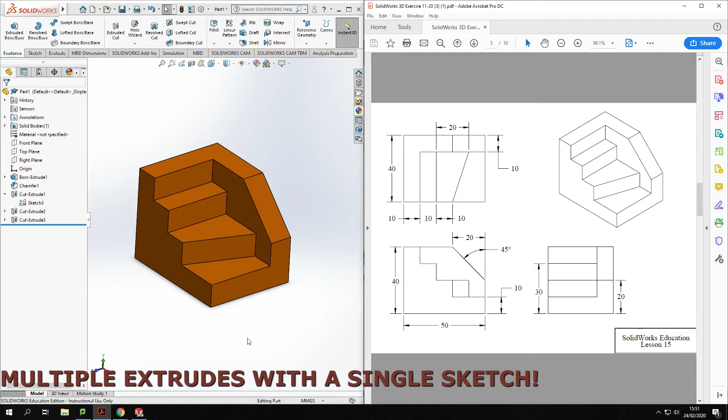This is another tutorial in the series of the Beginners Modeling series. What we are going to look at today is making this model here, and we are going to be looking at how we use a single sketch to create multiple cut extrudes or extrude cuts into this shape. So I'm going to take you through that process, and hopefully you all learn something new if you're just getting started, and this is going to be a great tutorial for you.

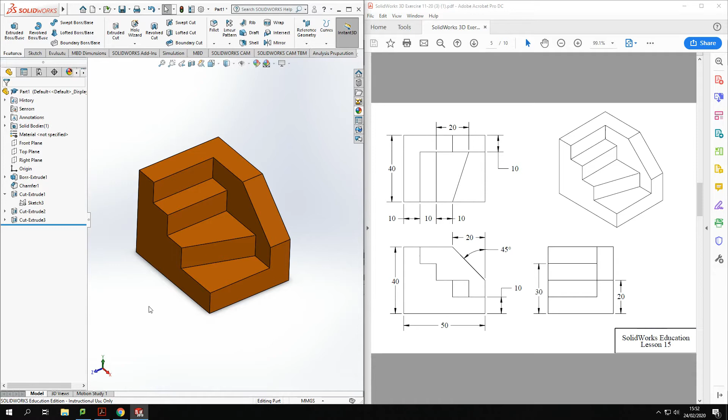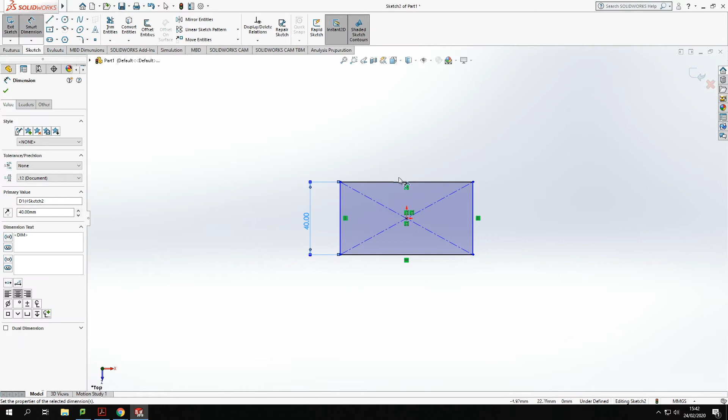Okay, so getting started then, we are going to start off creating the bottom shape and extruding it up to create a cube. So I'll go on the top plane and I'm going to sketch with a rectangle. Start from the center and I'll drag that out. Now, once I've dragged that rectangle out, I'll put some sizes to it. So I am going to have it at 40 mil. Right, and I am going to go 50 mil that way.

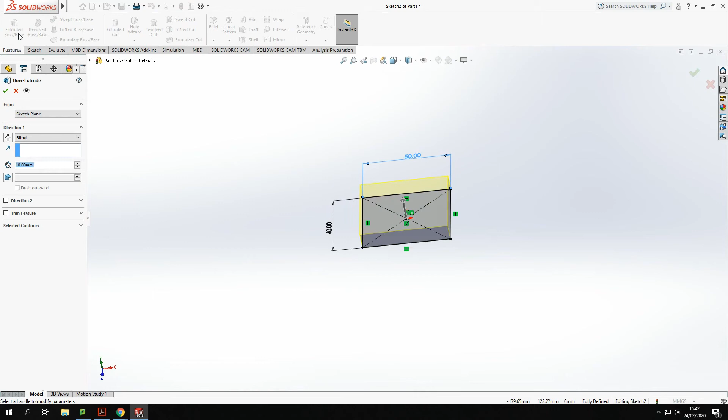Basic shape. Now this shape will extrude up to a height of 40. So I'm just going to rotate that slightly so I can see. Go to features, like so. I'm going to extrude that up. So go to an extrude. Now I can either drag this, so I could drag it up to the height that I want it, or I can type the distance in there, and I want that to be 40 millimeters high, like so. The box, and we end up with a cuboid, like so.

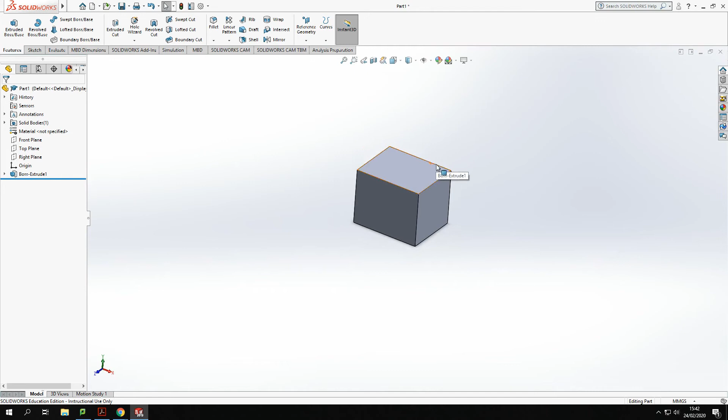Okay. Now, what I'm going to do on this model is I'm going to remove material. So I'm going to take chunks out of it. So the first thing I'm going to do is remove a section off the end. Now, I can cut that off, or I could use a chamfer. Now, for the sake of this, I'm going to use a chamfer, and it's going to be the chamfer tool here on this edge. And I am going to go 20.

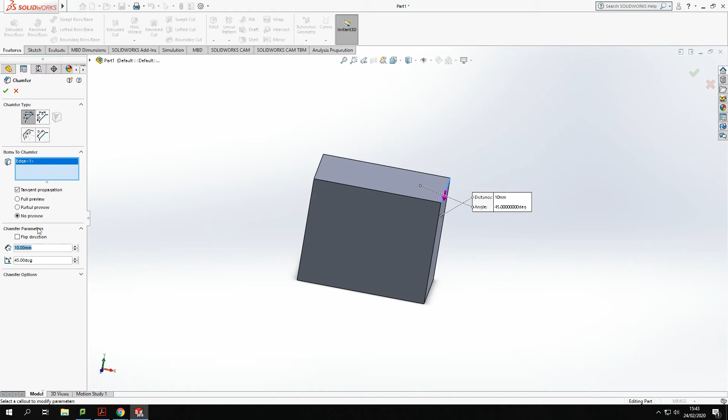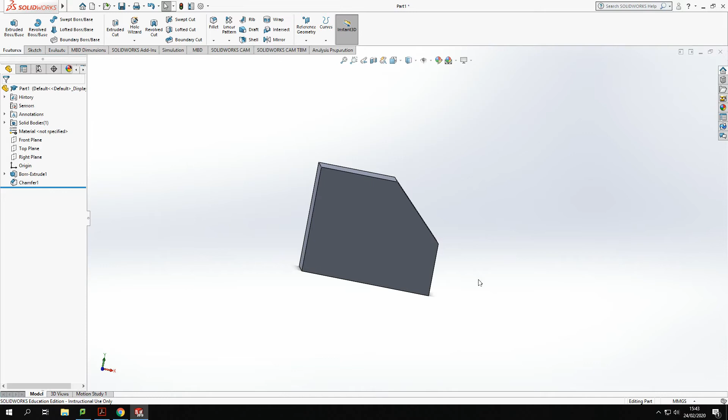Just so that I can see what's happening, I'm going to turn this to a full preview. So that will chamfer off that whole edge like so. So tick that, I'm happy with that. And tick. So because it was set at 45 degrees, it's got 20 that way, 20 across the top and 20 down the side, giving me that angle there.

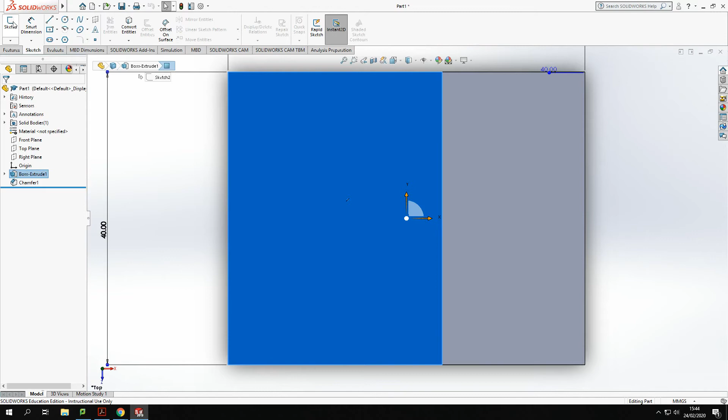Now, what I'm going to do here is go to the top view. So I'm just going to hit space bar, which will bring up my cube for my selection of my views. Click the top view there. And I'm going to sketch on the top of here. So click that top face, sketch, and I'm going to create another rectangle. This time I'm going to use a corner rectangle tool, and I'm going to come from here. I'm going to drag it out and across and just drop it somewhere around there.

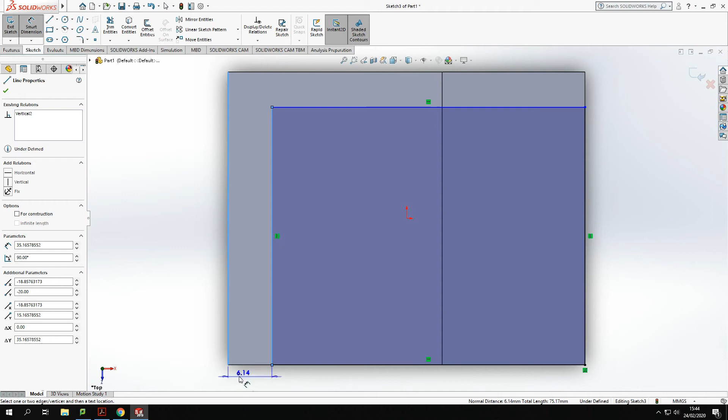Now, what I want to do is get this distance, this size. Now, the gap between the outer edge and this line needs to be 10 mil. So I'm going to click the outer edge and I'm going to click that line there. And I'm going to make that 10 mil. So, do the same on this side. Drop that there, and I'm going to go 10 mil.

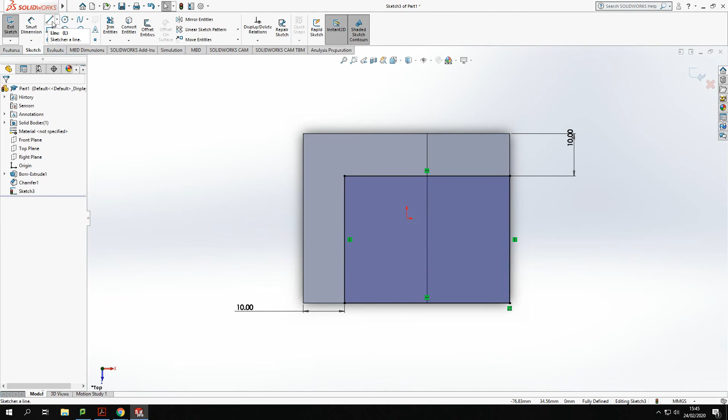Okay, now in this box, I also have the other cutouts, and I'm going to draw them all onto one sketch, and I'm going to show you how we use a single sketch to extrude down and cut out multiple shapes. So let's draw the rest of these on. So the first thing is a line coming across here.

And the second one is a diagonal line in here, like so. So if I dimension these up, from there to there is going to be 10. And from there to there is going to be 10. On the other side, from this point to this point, is going to be 20. So that'll give me all of them distances across.

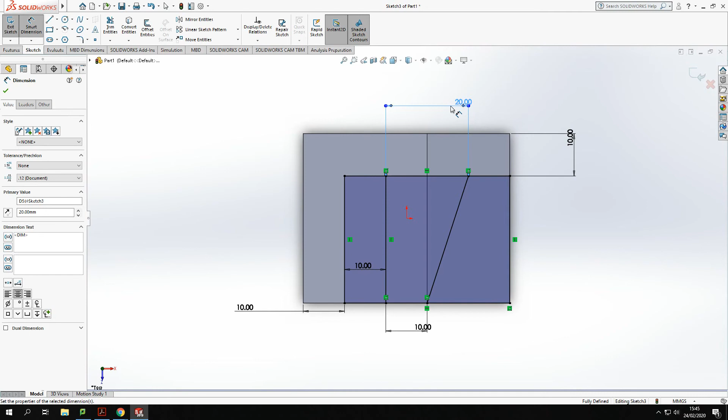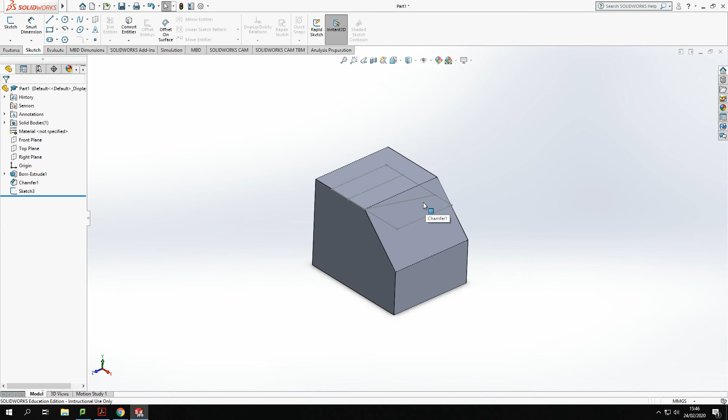Now I've got that sketch, I'm going to come out of the sketch and I am going to use that sketch to do my extrude. And if I just rotate that, so I'm just holding down there on the center of my wheel on my mouse, clicking down on it, holding down and moving the mouse, and that'll rotate for me. I'm just going to roll in and out on the mouse, zooms me in and out.

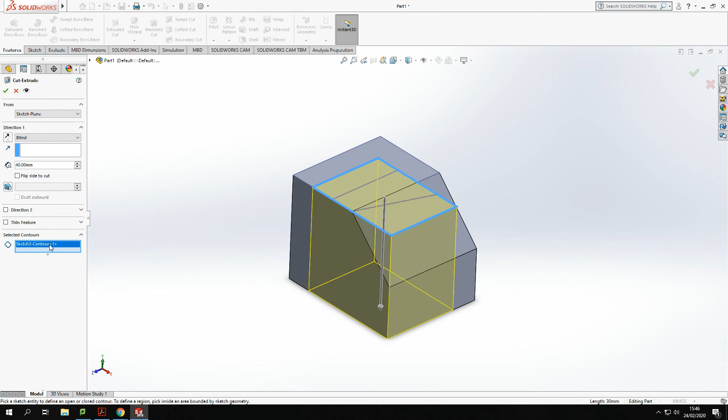Now, with this, I've got the right sizes and shapes here, but I want to extrude these bit by bit. I don't want to go all in one go. So I'm going to take this bottom section out first. Let's go to Features, and I'm going to go to Cut Extrude, and I'm going to use this sketch. Now, obviously, it's going to want to pick up all of the sketch. I'm going to come down to where it says Contours here. I'm just going to get rid of that contour there, because it's picking up the outer of the sketch. I just want to use that section there. Okay.

Now I know I'm 40 high, so I want to come down 30 to leave me a 10mm gap at the bottom. And tick there. See how it's removed that material down to that step. Now I'm going to do this a couple of times, but what I can do is I can use the same sketch over and over, so I don't have to redraw it. What I do is I come over to my initial cut here, drop down the arrow next to it, and I've got my sketch underneath. So I'm going to click on that sketch, and I am going to cut extrude again.

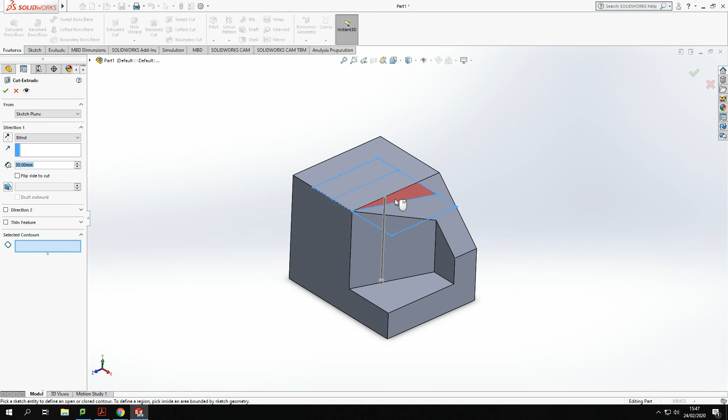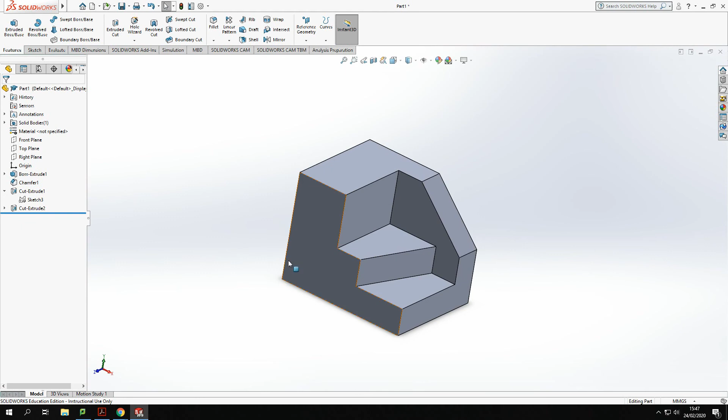And this time I'm going to select contour there and a contour there. And with that, I'm going to bring it down 20 rather than 30. So I'll change my 30. And that is going to put in that next step, as we can see there. Okay, and one last time, I'm going to use that sketch again. I'm going to come up to the extrude cut, and I'm going to click that last plane. And rather than it going 20, I'm just going to go down 10 and tick there. We've got our final shape of our component.

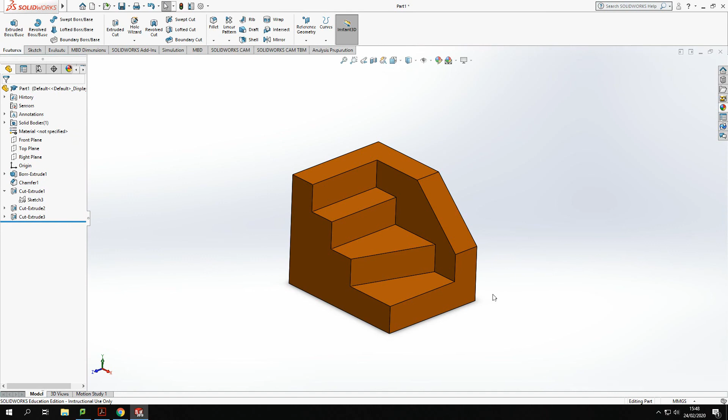Let's add a color to this. I always like having a little bit of a color on it. Let's add an appearance. Let's go orange for the sake of it. There we go. So we've got our final shape in a nice color, in a nice appearance, and we have got it to the exact size with that chamfer down the outside and the 3 steps, but an angle one in the middle.

Okay, now hope that was a good little tutorial for teaching you how to use the same sketch over and over to create multiple extrudes. You can do the same with the cut as you can do with the extrude boss base. So you could add material rather than taking it away. Works exactly the same way.